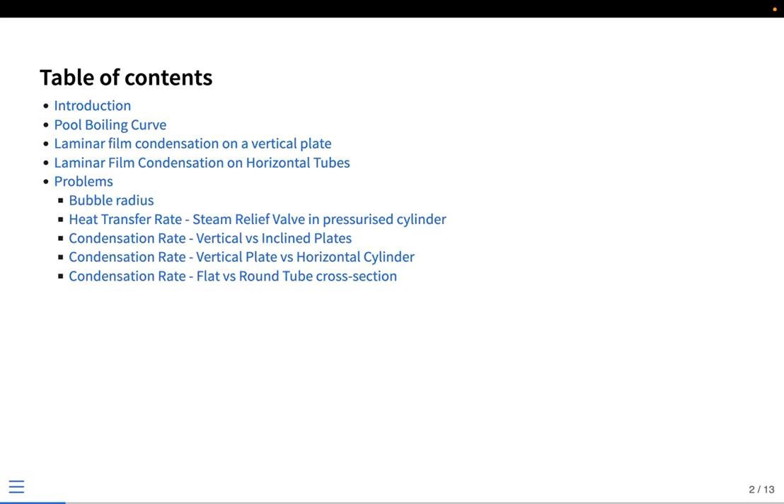The difference we observe between evaporation and boiling is that evaporation is a surface phenomenon, whereas boiling is a bulk phenomenon. The major difference is that in evaporation, the vapor pressure is actually less than the saturation pressure at that particular temperature. However, in boiling, it is the reverse.

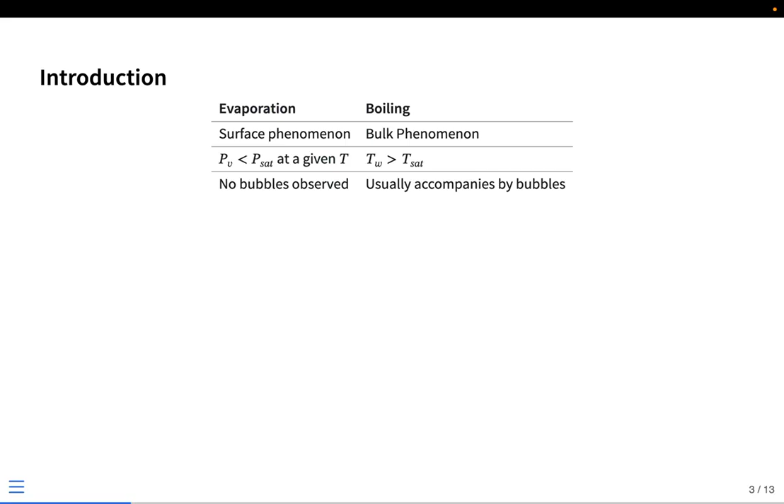For example, if you have water evaporating from the surface of the floor, what you usually expect is the temperature of the surroundings to be higher than the temperature of the water. So heat is taken from the surroundings and water gets evaporated back into the surroundings, not from the solid surface. Of course, in reality, if you have a vessel or container with water on a stove, you'll have both evaporation and boiling happening simultaneously.

The entire course is based on determining the heat transfer coefficient and Nusselt number. For this problem, the Nusselt number will be a function of the Grashof number defined in a particular fashion. The difference to notice is the appearance of this term: previously we had beta delta T here, but now instead of beta delta T, we have delta rho.

We also have a new number called the Jakob number, which tells us the ratio of specific heat to latent heat - the ratio of specific to latent heats of transfer. The specific heat transfer is due to temperature difference, while latent heat occurs at constant temperature. This ratio is given by the Jakob number.

The Prandtl number is already known, and the Bond number, BO, signifies the relative strength of buoyancy forces to surface tension forces. Even in boiling, we have further regimes: pool boiling versus flow boiling, depending on the actual natural cause within the boiling phenomenon.

If it's a natural convection process, largely due to buoyancy forces, then it is pool boiling. If it's because of external pressure gradients imposed by a particular application, then it is flow boiling.

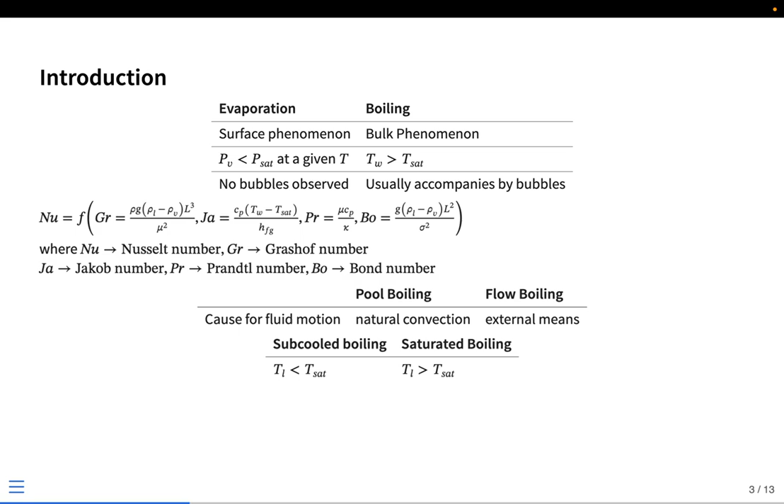We also have subcooled versus saturated boiling. If boiling is happening and the liquid temperature TL is lower than the saturation temperature, it's called subcooled boiling - boiling is happening but the overall liquid temperature is less than the saturated temperature. If it's greater than that, it's called saturated boiling.

This entire lecture focuses only on pool boiling; we have not gone into flow boiling designs. Within pool boiling, this particular case is when temperature is gradually varied - you have a heater placed inside a pool of water, you maintain and gradually increase the temperature of the heater.

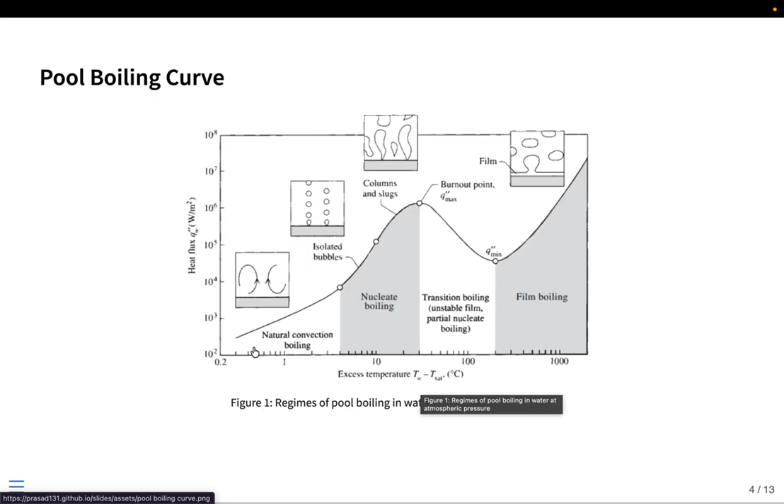This temperature difference, T wall minus the saturation temperature of that fluid at that pressure - for example, for water at 1 atmospheric pressure, the boiling point is 100 degrees Celsius, which is the saturation temperature. As we gradually increase the surface temperature of the heater, we usually expect heat transfer to continuously increase. However, what is observed experimentally is that initially, when the temperature is higher, natural convection starts.

The convection currents will set in, and the heat transfer coefficient will be proportional to this delta T. But beyond a particular point, the bubbles will start forming, and then you will have something called nucleate boiling. As the temperature difference keeps increasing, the rate at which bubbles are coming will also increase.

These bubbles will eventually combine with each other and form columns. Again, this will reach the maximum - once the column reaches from the bottom to the top, you will have the maximum heat flux that is happening. That is called the burnout point.

If you keep heating beyond that particular point, there is some transition zone, followed by which we enter into something called film boiling, where the surface of contact between the heat source and the fluid will actually be replaced with a vapor film. Because vapor film has lower thermal conductivity, there will initially be a minimum formed, and subsequently a combination of radiation and conduction happens across this vapor film, and it keeps increasing. The heat flux keeps increasing with temperature.

So we identified three or four regions here. For each, depending on which regime you are in, the way you calculate heat transfer is completely different, because the mechanism for heat transfer is different in each of these regimes. If you are in the first regime, whatever we have been discussing in the last week, those will be the equations you use here.

In the next part, that is with respect to boiling. The next one is for condensation. So the simplest case is condensation over a vertical plate. The parameters that we are interested in are: what is this film thickness, what is the rate at which condensation is happening, and what is the net heat transfer from the surface.

These are the correlations that are given, based on the assumption that the flow is laminar and we do not have any adverse pressure gradients. So whatever vapor is here, the surface is at a lower temperature, the vapor comes in contact with that and forms a liquid film. There are no droplets - the film is a continuous film. These are some assumptions.

With these assumptions, these are the equations that are derived. You just take the Navier-Stokes equation and remove the terms one by one by applying the simplifications. For this particular derivation, we are assuming that the velocities are very small and the effects of inertia are very small compared to the buoyancy forces. With that assumption, we ended up with this equation.

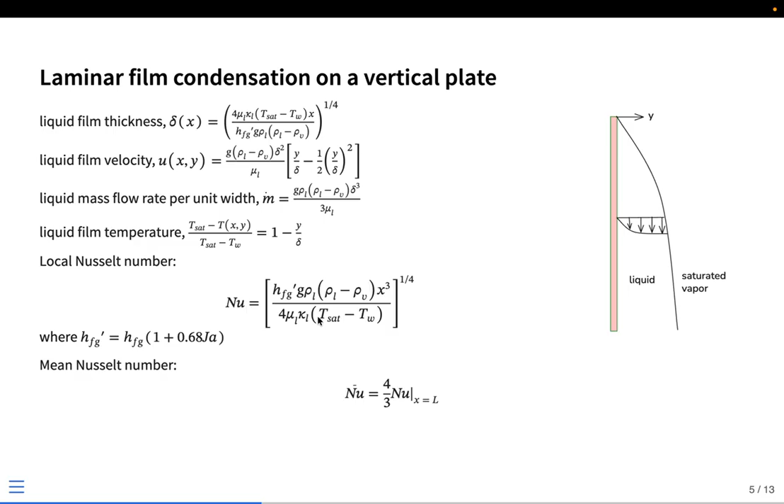So it seems more empirical - we do have derivations for these formulas, you can go through the lecture videos, for the laminar case. However, if it is turbulent, then again we have to go with empirical correlations. But for the laminar case, it's straightforward.

You start with the Navier-Stokes equation. We use assumptions that there is no pressure gradient, and then we neglect the inertial terms. Then we'll be having a balance between the buoyancy forces and the viscous forces. The buoyancy force is the gravity trying to pull the liquid downwards, whereas the viscosity is trying to hold it, make the velocity uniform. The balance of these two forces will determine what the velocity profiles or the mass flow rates and heat transfer coefficients are going to be.

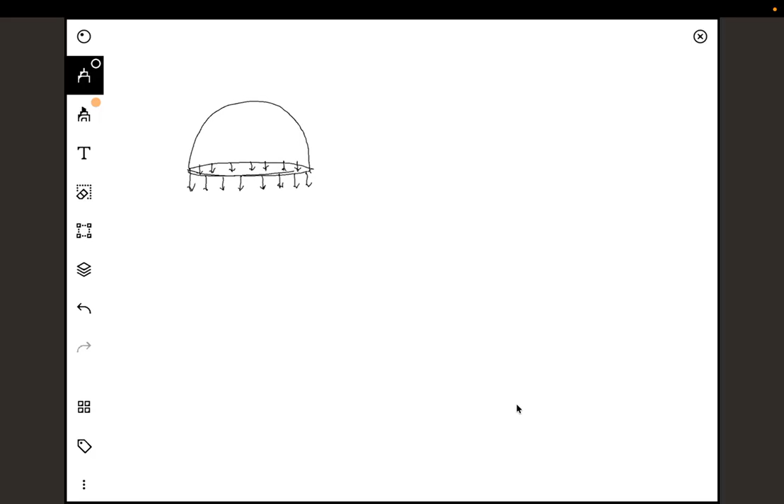So you have to do a free body diagram. Let's say this is the hemisphere you are speaking about. If I cut this entire sphere into two halves, I'll have the surface tension force on this, and this surface tension force is actually the extra force keeping the drop intact. So the net pressure on this because of the vapor, minus whatever is the outside liquid pressure, should be balanced by the surface tension force. This is the basic balance: the liquid pressure acts, and the vapor pressure acts from inside. Both should be balanced, and that difference should be balanced by the surface tension force. That is exactly why we need PV to be greater than PL, otherwise the bubble will just collapse.

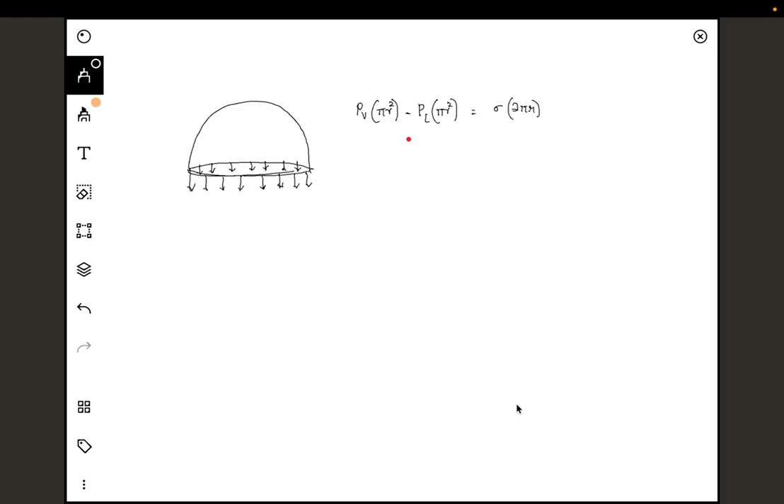So now with this equation, we can directly get the value of R. This is a straightforward one.

Of course, now let's say if I want to use the Clausius-Clapeyron relation, which is dp/dt, where this is a specific volume difference. Since we are talking about water, VFG can be written as Vg. So dp/dt can be approximated with this.

But the question now is how do I relate this, how do I find radius in terms of this? In order to find this radius, I need to know PV and PL. It is given that the liquid temperature can be assumed to be the saturated temperature. So let's do the Taylor series expansion for pressure, the saturated pressure at TV, which is the saturated temperature TL plus some delta T.

So this is the problem I'm just presenting now. You can have a look at the problem.

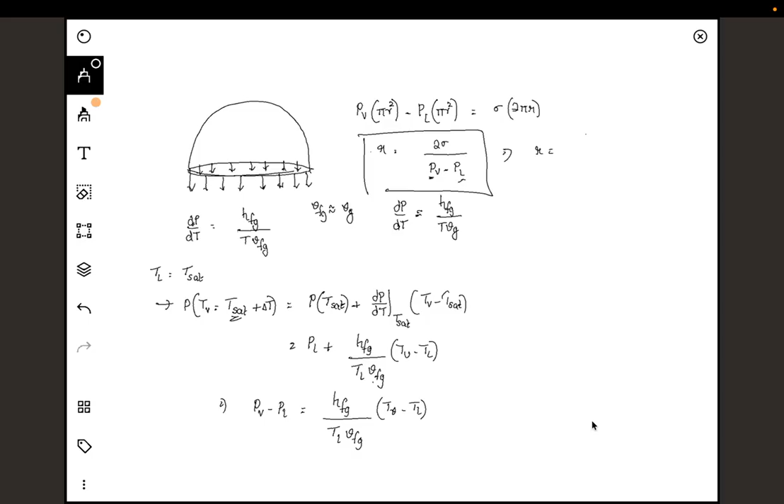So as I was saying, the idea is to get the radius of the bubble in terms of temperature. We can use Taylor expansion to get the pressure around the saturated temperature. It will be P, assuming the liquid is at the saturated temperature. This will be PL plus dP/dt, which from the Clausius-Clapeyron relation you can replace with this. At saturated temperature, this will equal TL times TV minus TL. From this we can compute PV minus PL, and if you substitute that back into the radius equation, you'll get the equation for R in terms of temperatures.

The last part asks you to actually calculate the value of this radius, which is again straightforward. I've just written it again in Mathematica.

You have to write that the net force acting on the bubble should be zero, which is PV times pi r squared minus PL times pi r squared minus sigma times 2 pi r, equal to zero. We solve this equation for the variable r, and this is the solution, the one I just showed now.

The next step is to take the same equation but use the Taylor substitution where PV is replaced with PL plus the dP/dt term times TV minus T saturated. Once I do that, this is the equation for radius I'm getting in terms of the temperatures. In this problem, the values of surface tension, HFG, and all these values are given, so if I just substitute them, I'll get the radius directly.

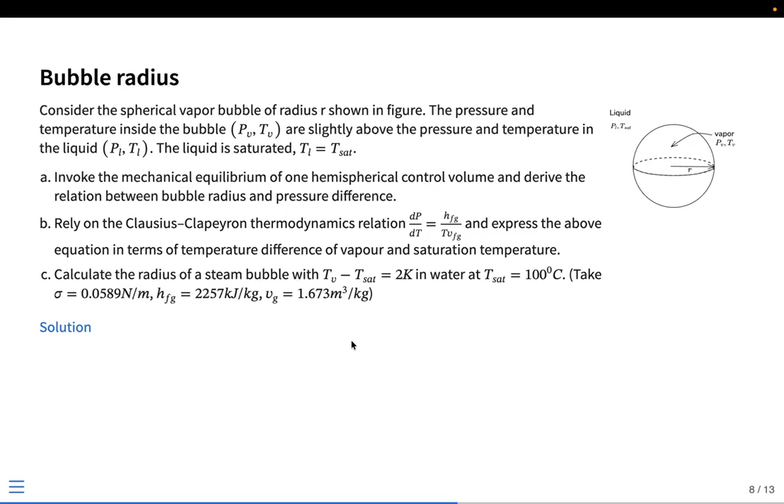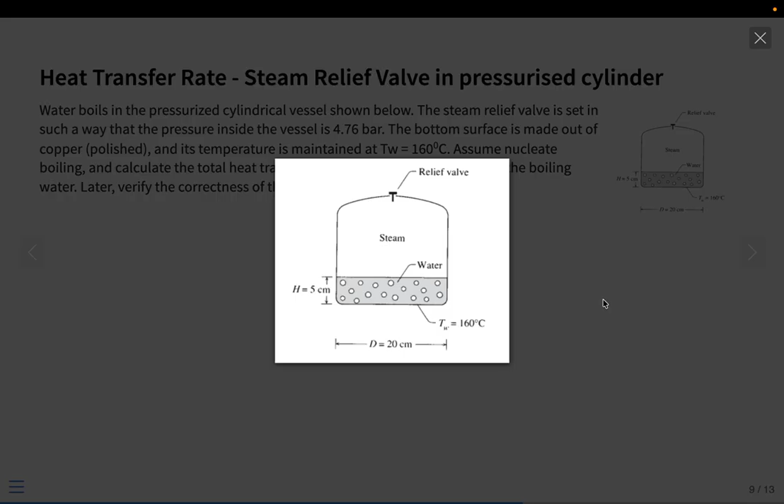So the pressure is maintained at a constant level, given as 4.76 bar. At this pressure, the bottom surface is made of copper and its temperature is maintained at 160 degrees Celsius. Assume nucleate boiling and calculate the total heat transfer rate from the bottom surface to the boiling water. You also have to verify whether your assumption of nucleate boiling is correct or not.

How would you go about doing this?

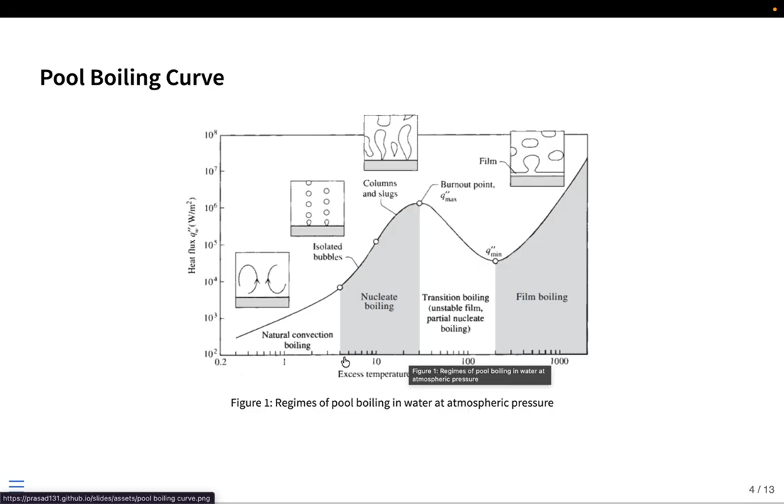So you compute the heat flux and see if it is less than Q max, and also see where the excess temperature lies. It will be somewhere between 5 and 20, or 5 and 30. If it is within that range, you can assume nucleate boiling. That could be one criterion.

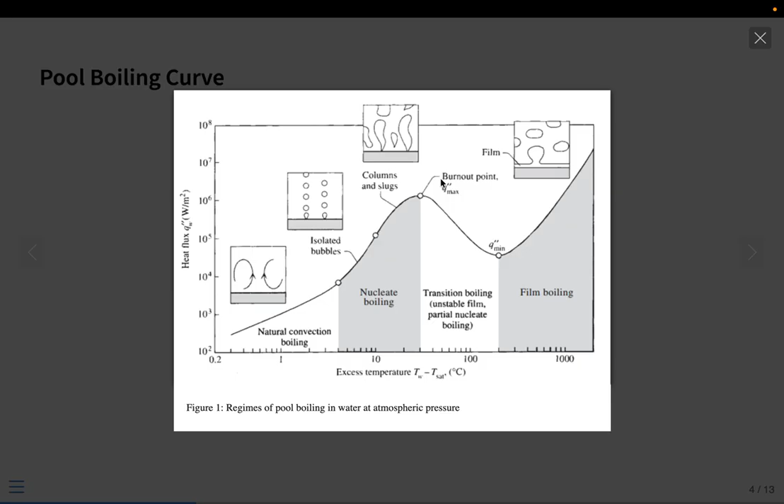Also, you have to check whether the heat flux that you are getting using the corresponding heat transfer correlation is less than this burnout point. Then you can assume that your assumption of nucleate boiling is correct.

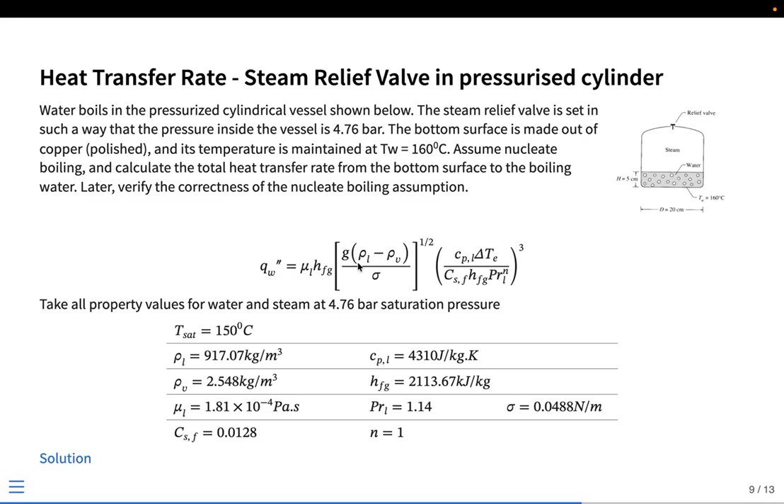But the question asks you to find the total heat transfer rate, so use that to find it. Basically, you have to multiply it with the corresponding area. That will give you the total heat transfer rate from the wall.

Once you have the total heat transfer rate, the last question asks you to verify the nucleate boiling assumption. Calculate the critical heat flux and see whether the heat flux you are getting here is lower than the critical heat flux limit. Then it is a fair way to check whether you are within the nucleate boiling design.

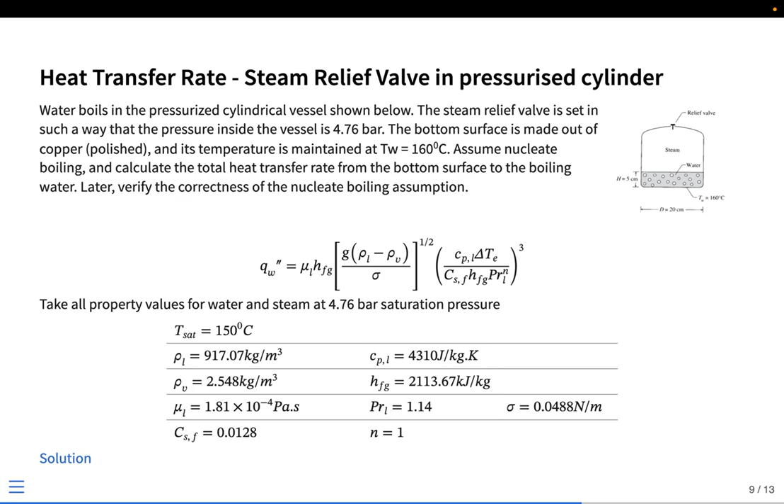Yeah, hope you have done it. You can just cross check.

The pressure and temperature values are given. Again, I have used the same tool as before, wherein you can get all the property values directly and substitute them into the heat flux. Check whether you are getting the same answer. This is around 4.2 kilowatt per square meter, that is the heat flux.

Multiply with the area of the base. The base diameter, inner diameter is given as 20 centimeters. So just multiply pi d square by 4, that will give me the net heat rate to be around 132 watts.

The maximum heat flux is way too high compared to this. For that we use a different correlation, 0.149 times hfg rho v times this particular quantity, bond number, which will give me the maximum heat flux. This is an empirical correlation. This is around 10 power 6, this is around 10 power 3, so you can see this is way higher than the QS predicted from the correlation, which means we are still in the nucleate boiling regime.

Is there anyone whose answers are not matching with the values given here? Or are there any questions?

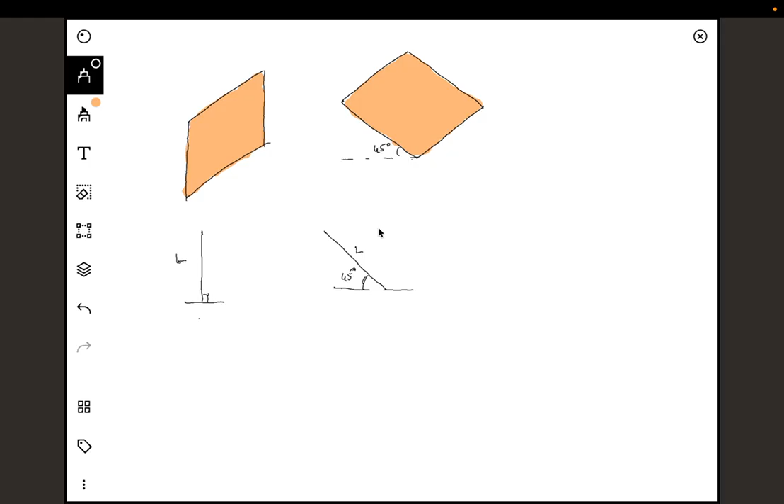So here it is say 90 degrees, and here we have 45 degrees. This is case 1 and this is case 2. So which one will have a higher rate of condensation? Again, we are assuming it to be laminar and film condensation rate, assuming it to be laminar and then film condensation is happening, no dropwise condensation. So if it is assumed to be film condensation and still in the laminar regime, which of these two cases will have higher condensation rate?

Maybe I'll show you the question and wait for like 5 minutes or so. The idea is to understand how the mass flow rate is related with the angle of inclination. The heat transfer coefficient, you already know how they are related with each other, it's already there in the lecture slides. You can go through the slides again once and get a quick idea of how it varies with respect to angle of inclination, heat transfer coefficient, and from that you should be able to estimate how the rate of condensation is related with the angle of inclination. Or let me put that equation straight, simply, then it should be fairly straightforward.

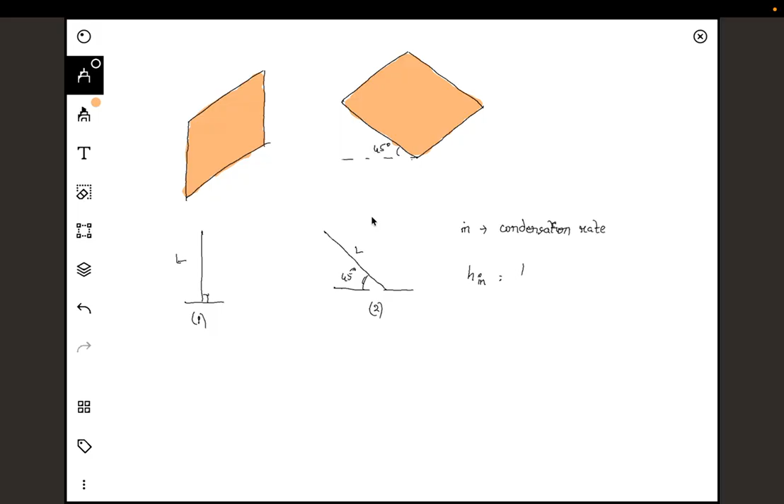Let's say if the heat transfer coefficient for inclined plate versus the straight plate, if I have to compare, then for the inclined plate, that equals whatever is for the straight plate times sine theta to the power 1 by 4. If I say the heat transfer coefficient is related in this way, how would the mass flow rate be related with each other? Like how would the mass flow rates relate with each other?

Yeah, just give it a thought. I'll wait for say 5 minutes and then we'll discuss.

So this is the equation for delta that we have, and we know how m is related with delta. All I'm doing is replacing g with g sin theta, because in the governing equation we'll be having the g sin theta term. So these will be my two equations.

If I substitute delta into this m dot equation and then substitute theta equal to 90, it will give me m dot for a vertical plate, and theta equal to 45 will give me the case of a 45-degree inclined plate. So this will give me the ratio of those two, and the ratio is 1.09.

So this is the ratio of straight to inclined plane, which means that a vertical plate will have a higher condensation rate, around 9% higher than an inclined plate. That is essentially because the effect of gravity has reduced.

In this particular problem, we are also asked to find the film Reynolds number. The film Reynolds number is 4 times mass flow rate divided by mu L. All we need to do is get mu L, take the property at the film temperature, and substitute the mass flow rate given in the problem, which is 0.063 kg per meter second.

If I just substitute those values, that particular value comes out to around 802 or so, which is less than the critical number for transition, so it will be in the laminar regime. It will still be in the laminar regime.

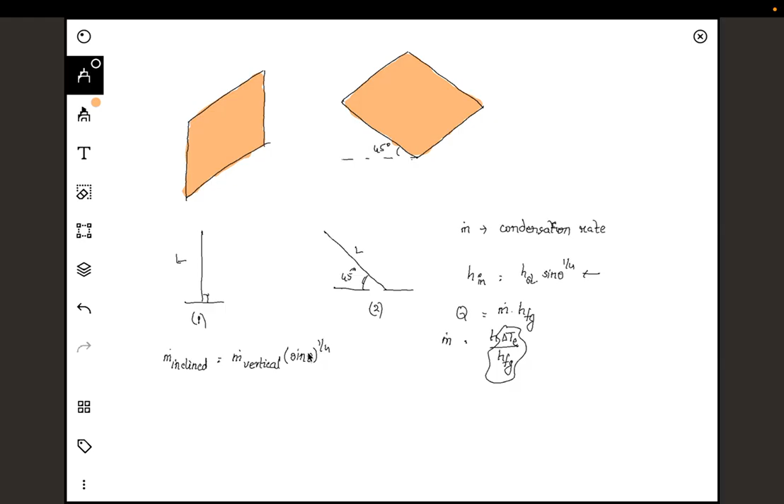This is a straightforward problem. The only thing you need is to either remember these equations, or remember the equation I have written here, that the heat transfer coefficient is proportional to sin theta to the power 1 by 4. If you know either of these, you will be able to estimate this relation and get the solution. Are there any questions in this?

I guess there are no questions.

So similarly, instead of vertical and inclined planes, let's go to the next problem: a vertical plate versus a horizontal cylinder.

So say a saturated vapor is condensing on a vertical slab of height L. If both sides of the slab are covered by laminar films of condensate, and a single horizontal cylinder of diameter d, at the same temperature as the slab, is immersed in the same saturated vapor, there will be some particular diameter d at which the condensation rates will be the same on both the plate and the cylinder. What is the d by L ratio at which this happens?

I hope the question is clear, or let me just elaborate it. So basically I have a flat vertical plate, and then I have a horizontal cylinder.

So all I'm saying now is there will be some condensation rate associated with this vertical plate, and then there will be some condensation rate associated with this horizontal cylinder. So what we are saying now is I want m dot v equal to m dot h.

With this equation, what will be the value of d by L? This is just like the previous problem. All you have to know is how the heat transfer coefficients are related. If you know the equation for the heat transfer coefficient, you can estimate the equation for the mass flow rate or condensation rate, and take the ratio of these two quantities, equate it to 1, and that should give you the value of d by L. I think this should take 5 minutes to solve. I'll wait for 5 minutes.

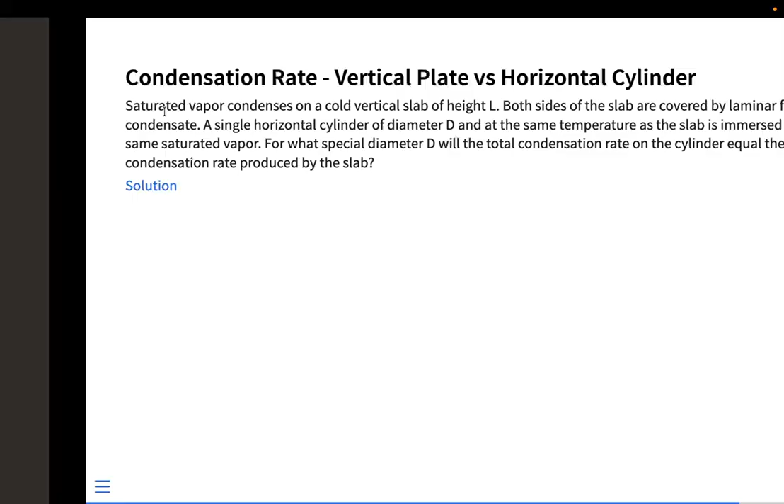That's exactly the reason I have used, even for the plate, the flow rate I'm considering, I have just put L here. Even though in the problem it's specified that both sides of the slab are covered by laminar films of condensate, which means I should ideally use 2 here, 2 times L, but I've just cancelled that 2 directly. Ideally this will be 2 times H plate times L times this, and this equation will also be 2 times this entire equation. Since we are equating M plate, both the flow rates to be equal, the 2 will anyway get cancelled. That's why I've not included them here.

But if you're getting confused, then maybe I should just put that here, so it will be clear when you see the solution at a later point of time. This too is just to ensure that both sides are being taken into account. Of course, the answer would not change.

Is this clear? Yeah, I guess that is clear and there are no questions on this.

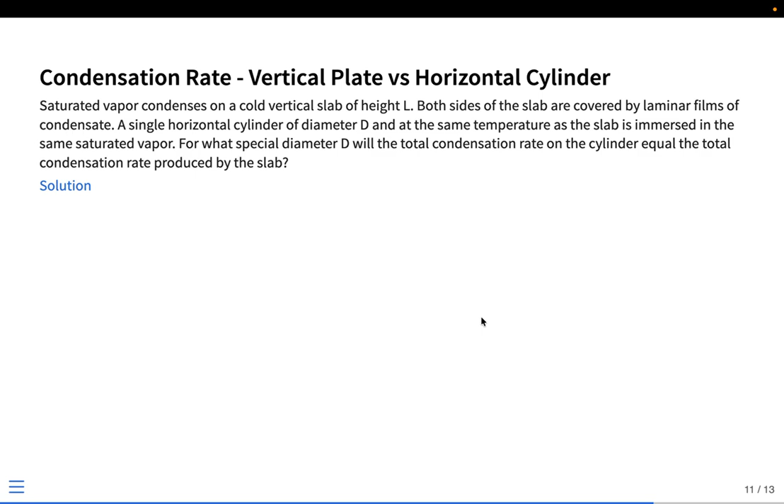Calculate the percentage increase in the condensation flow rate associated with this design. So I have two possible designs available to me. Either I can have it as a round tube, or with the same perimeter, I can take the same material and make it like a flat tube. Here, the condensation will be happening on the surface. Again, the fluid will fall like this, like a film condensation. Here also the film condensation will happen.

Which one of them will have the higher condensation rate, and what will be the percentage increase in the condensation rate? It is proposed that by converting into a flat tube design, your condensation will actually be higher compared to the round tube, because of the effect of gravity. Here, gravity is acting in the same direction, so it will be the strongest force. However, here only a component of gravity will be acting on the surface, so the pulling force from gravity will actually be lower, so the condensation is expected to be lower here compared to the other design. The question is how much percentage higher it is when you use the flat tube design.

I think the question is clear. It would be very similar to the one we solved just now. There's only one trick in this. In the previous problem, we were trying to get the ratio of D by L, given that for the plate as well as the cylinder, the condensation rates were equal, and asked to find the value of D by L. In this problem, D by L is given indirectly, and you're asked to find the ratio of the condensation rates.

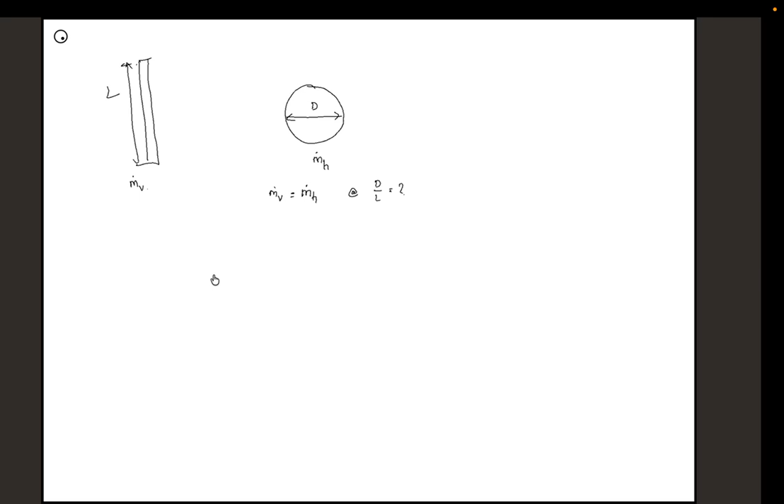So all the correlations, etc., will remain similar. If you want to see the correlation, I'll just show the same equations. So these will still be my correlations.

This will still be the same correlations. The only difference now is I'm trying to use the relation between D by L, as the perimeter of both cross sections will be similar, which would mean that L equals pi d by 2. So pi d is the perimeter for the round cross section, and for the flat plate we'll have 2L as the perimeter. Since we're assuming the thickness to be negligible, L is approximately equal to pi d by 2.

With this assumption, if I substitute it back into the ratio of plate to cylinder, I'm getting around 1.15. What this means is by converting from a round tube to a flat plate, I'm getting around 15% increase in the condensation rate.

Maybe I'll wait for a couple of minutes so you can solve it yourself and let me know if you're getting the same answer. I hope you got the same answer. Are there any questions?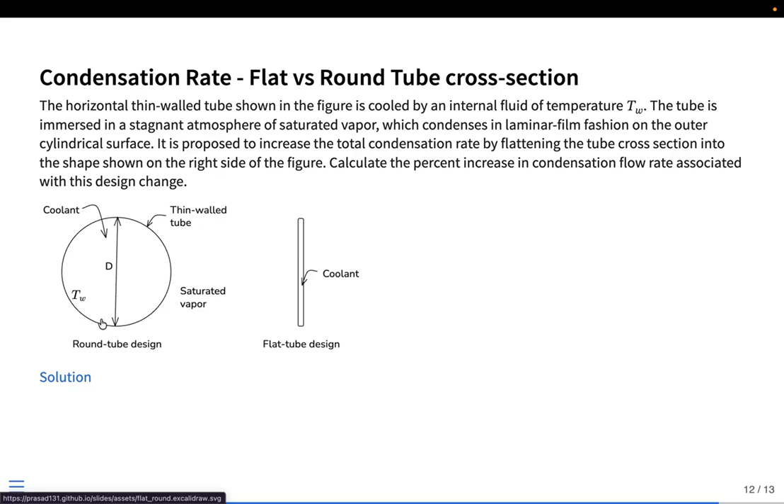So there are no questions, and I think we can end the session for this week.

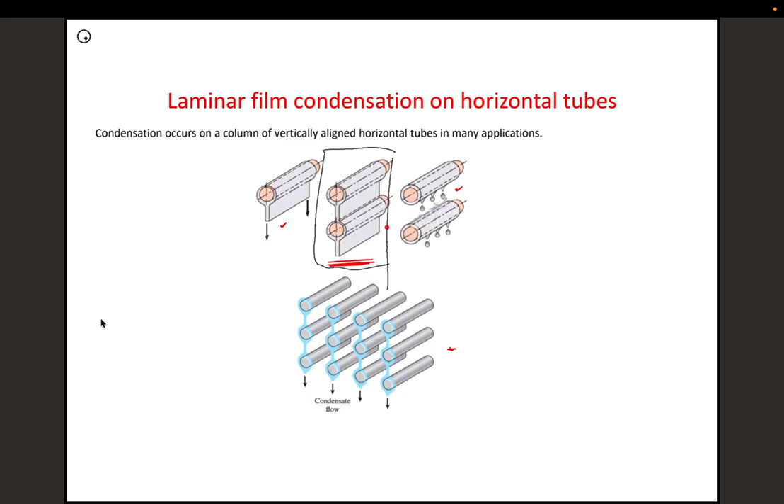Assume you're in a range where you have a thin sheet of film, so you're still in the laminar regime, and film condensation is happening, not droplets like you might see elsewhere. If you have n such tubes, between any of these tubes, whatever mass flow exists for the first tube, all the equations remain the same as before. However, as this liquid falls on the surface of the second tube, we'll have an extra mass flow rate, an additional flow. If I consider a control volume here, I'll have an extra inflow, unlike the first tube, and that keeps adding up as I go downward, the extra flow rate from the top tube also gets added to it. So we'll start with the same equation as before, just rearranged a little bit.

All we are doing now is this correlation, which relates how the mass flow rate between these two is getting affected. From that, we solve them simultaneously, one by one. Initially, for the first tube, we do not have any n minus 1, so this is not there - this is the equation we already got previously. For the second tube, it will be the first tube plus whatever extra we get from here. As you keep increasing, this particular term gets added eventually.

Are there any questions?

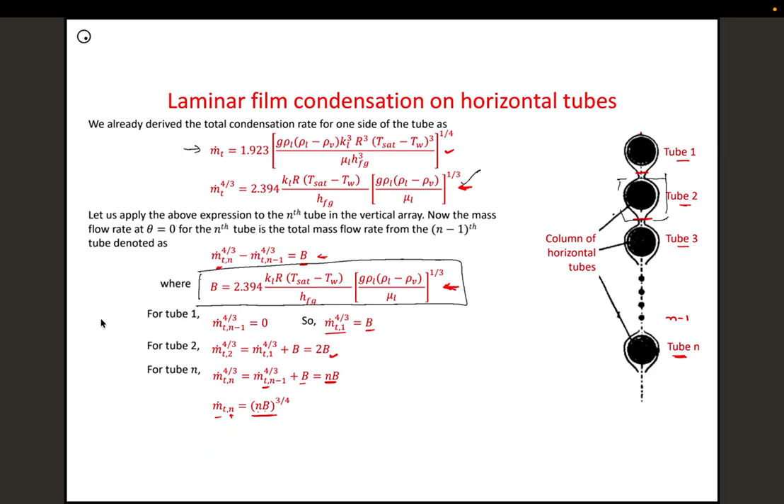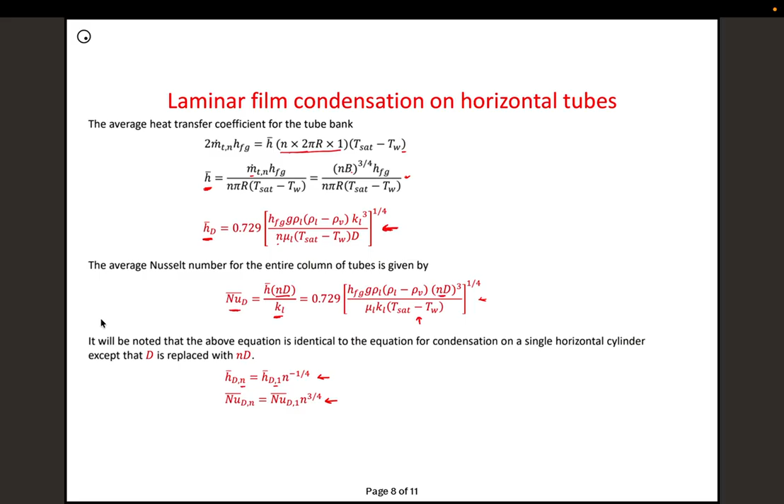Once I have m dot at any particular point, all I have to do is take the heat transfer coefficient, which we already have the equation for. So whatever is this mass flow rate - since m dot t,n is only on half side of the tube, on both sides it will be 2m dot times the latent heat, which should be equivalent to average heat transfer coefficient times the net surface area up until that particular tube times T saturated minus TW.

From this, we'll get the average heat transfer coefficient. Once I have the heat transfer coefficient, I can compute the Nusselt number. Just make a note that in order to get this Nusselt number, we are using the characteristic length as n times d. And just substitute those values back.

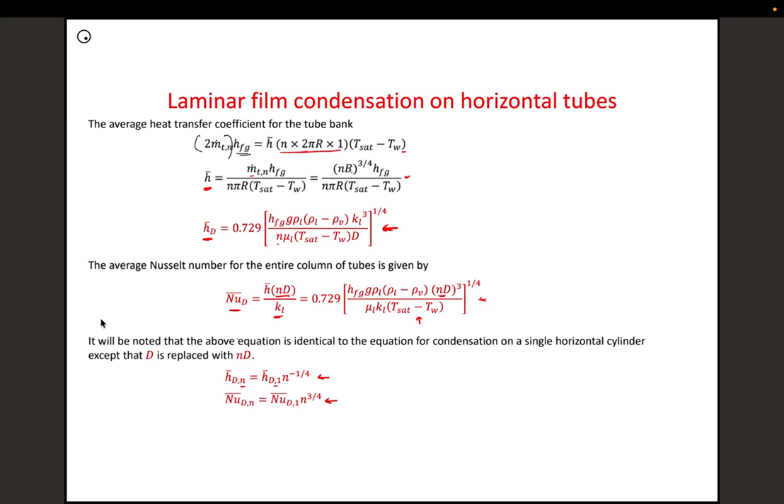Now this is another flow. Again, all of these are based on the same things I have said before. Most of these correlations will be there. All you have to do is pick the right correlation that is applicable to your particular problem.

So in your particular problem, you have to know what is the corresponding number. In this case, if you know the Reynolds number, get the Reynolds number, check for the corresponding correlation in the literature, use that correlation - usually this will be presented in terms of Nusselt number. Get from that Nusselt number, determine the characteristic length and other properties, use the value, get the value of heat transfer coefficient, and from that either find the temperature difference or the heat transfer, whichever is your object of interest.

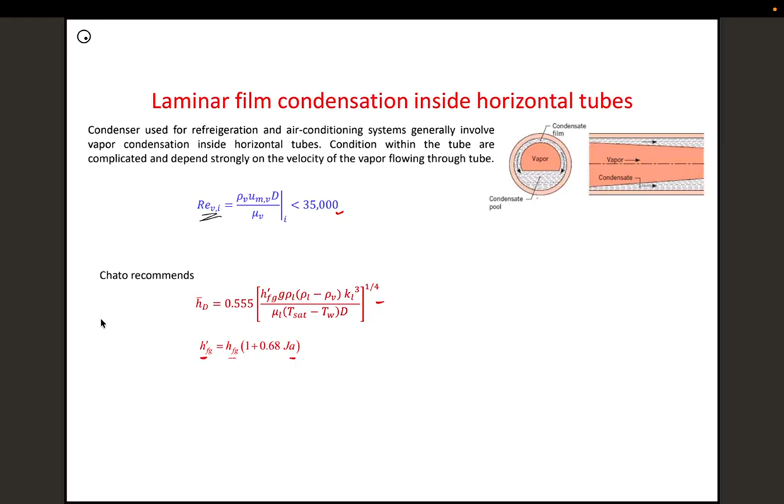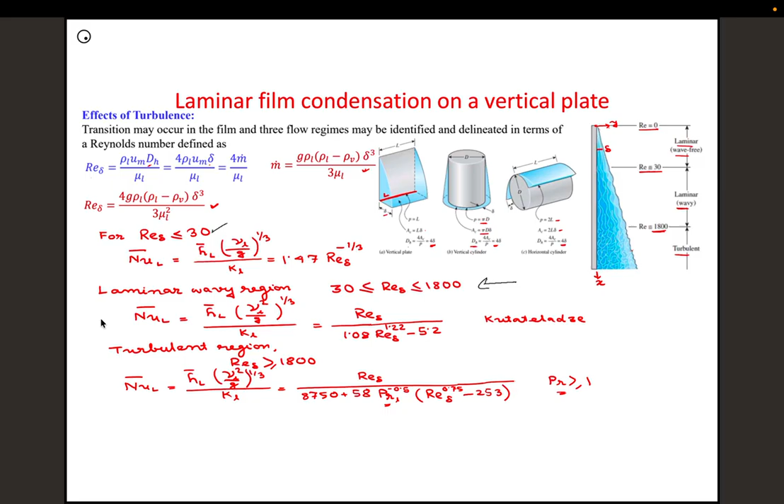Again, of course, this relation is valid for laminar film condensation only, and the other assumption is that theta should be less than or equal to 60 degrees. This equation is not true for horizontal planes.